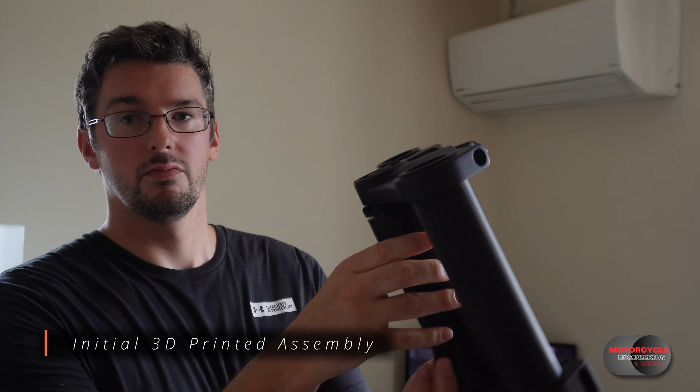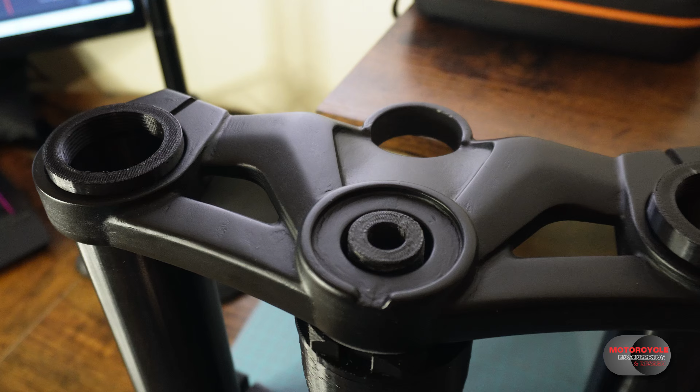So this is the mock-up of the headstock assembly with the triple clamp, top yoke and bottom yoke assembly. And this top yoke is actually based off of a Kawasaki, I think it's a ZX4R these days. I quite like the design, so I had a little go at modelling it and then I 3D printed it. This has no variability, of course, so what I wanted to do was work on trying to create a top yoke that had some variability.

And the way that I did that would be to split the clamps here, and the part that would then attach here would incorporate the clamp for the handlebar. So let's have a look at that. So if you're interested in 3D CAD, that's coming up now. If you're not, then skip to here.

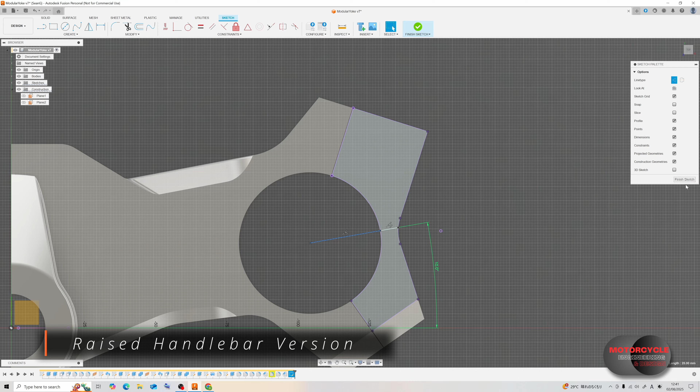Okay, so this is where we left off at the end of part 1, just with the whole right hand side modelled minus some details, ready to mirror across. But before that, I want to continue with modelling the modular parts. So I want to start working on the right hand module, and for this I want to build a tower which is going to provide somewhere for the handlebar clamp to be built into.

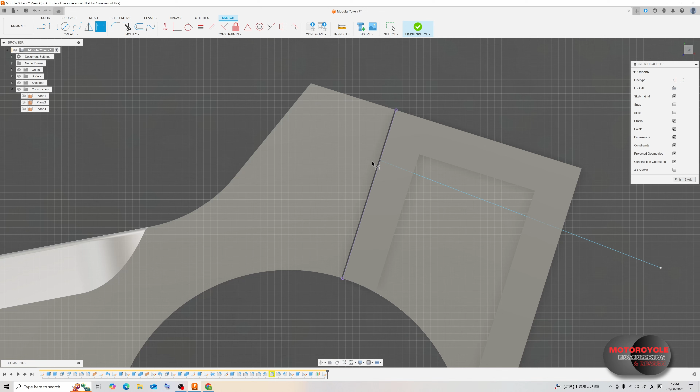Now this doesn't have to be a solid block that's been extruded here, so I have kind of shelled out the inside of this extrusion here. Then I'm using an offset plane, so that I can adjust the height that this clamp feature is going to be built later on, just in case I want to change it.

Now I'm also setting up where the handlebar is going to be, the handlebar clamp feature. So this is the axis I'm positioning here. I'm just setting the length and the angle, so it's about 23 degrees and 250 millimeters in length. Of course this sketch is only from a top view, but the handlebar is actually going across 3 dimensions.

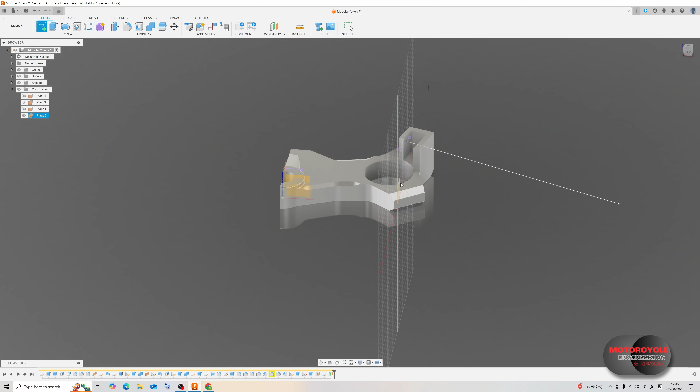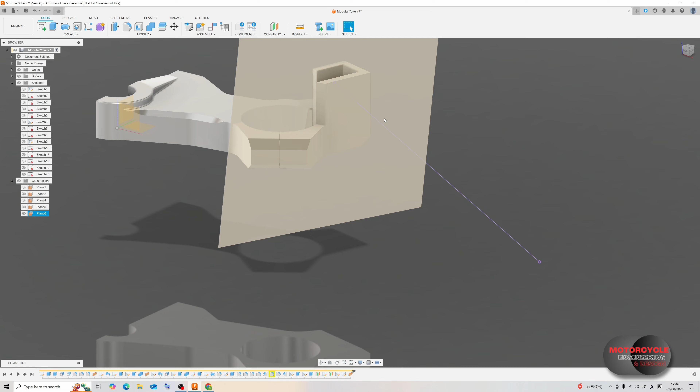So I add a sketch on the central plane, add an angle, constrain it in terms of distance relative to the top sketch, and then I create a new sketch and then use the intersection curve to create that 3-dimensional curve. Now that I have that, I can start using a plane along a curve and position it at the very end to then start building up the actual structure where the handlebar is going to be clamped into.

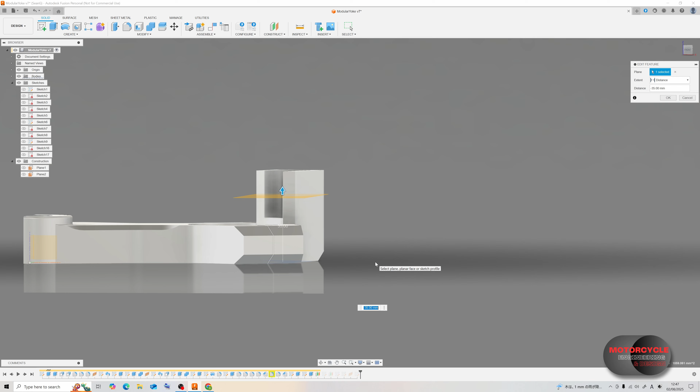So I'm now starting to extrude the boss feature, or the structure that the handlebar is going to be clamped into. And I can easily adjust the height of this by adjusting the height or the offset of the plane that I used to construct this geometry earlier.

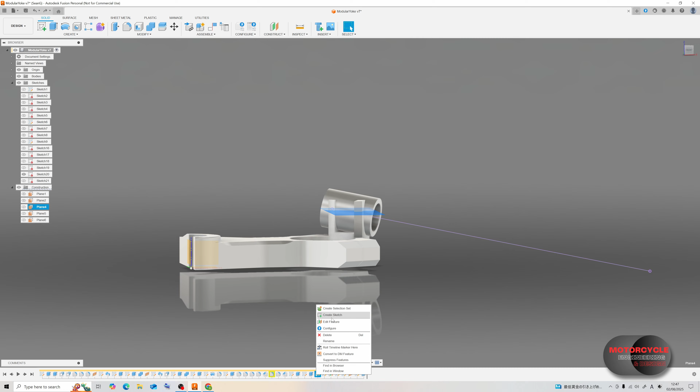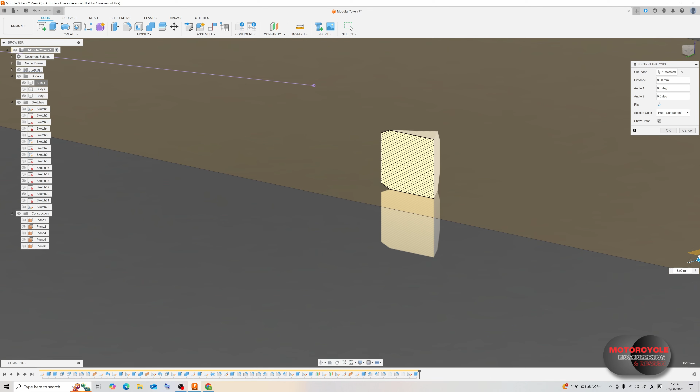Now sometimes strange things happen in Fusion 360, and I came across a strange bug here. My main body wasn't recognized as a body, so I could never combine it with anything. But I did spend some time going through the model trying to figure out what was causing this problem, including using a cross-section view to see if there's anything abnormal. But no, there was nothing. This was all resolved just by restarting Fusion 360.

So you'll notice there's some slightly different geometry here since I did actually remodel it before I realized I just had to restart Fusion. So I just wanted to add some extra detail here, so I used a mid-plane across this structure, and I sketched out a profile to cut and added in some chamfers.

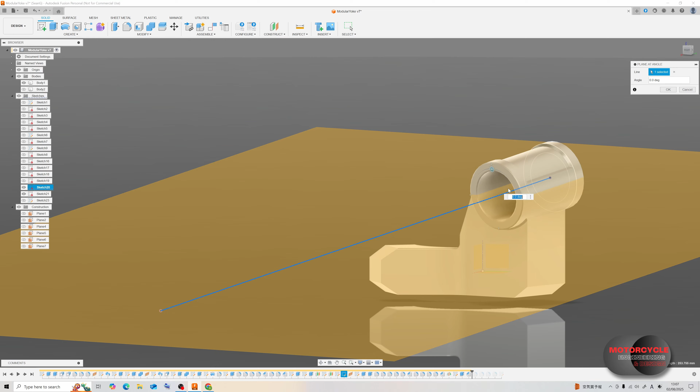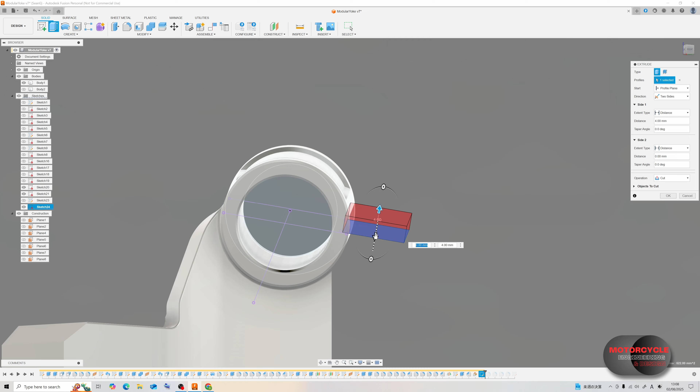Now of course this is actually going to be clamping over the handlebars, so I need some clamping force. So I add in some material for the bolts. Of course the way I've done it here is very rough, but it was just to model it simply. It would be much better to have rotated this round the body so that it was actually clamping into the tower, and that would have just made it a bit more tidy.

And if you spend too long in CAD, you'll start seeing animals or faces in almost everything.

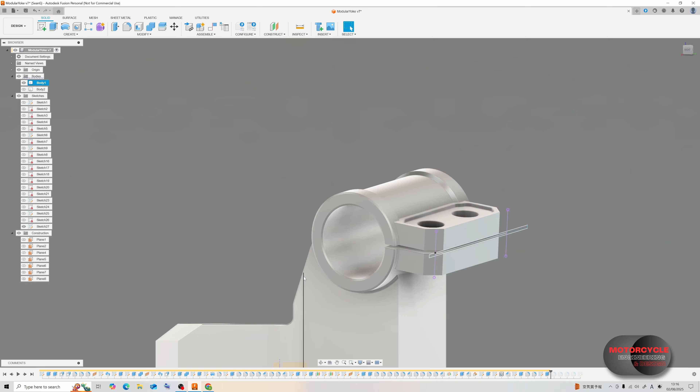Now for the main body, I want to add a little extra detail just to stylize it, make it a little bit more aesthetic. But I also have some ideas for a riser to clamp into this feature later on. We may come to that in another video.

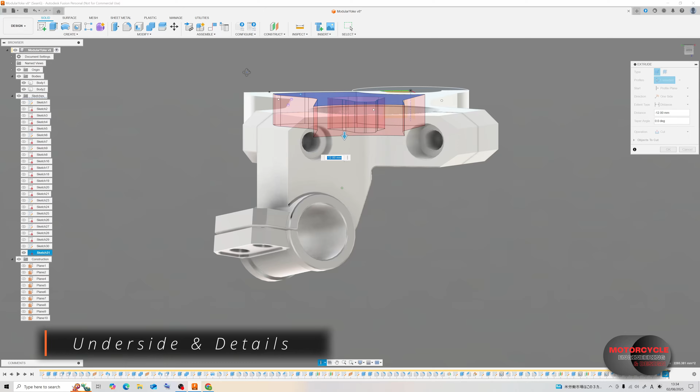Okay, now I want to start removing the material from the underside, so shelling this whole piece, but then also including some rib stiffeners. I've added a part in the center here, but actually I don't want that, so I've removed that. I've added in a new rib because I actually intend to enclose a keyless module inside the yoke here.

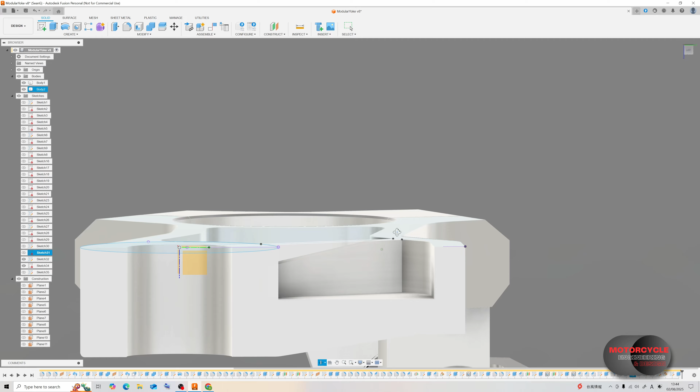And there's a lot of other details that I added in, like rounds and chamfers, and also this cutout here which I intend to be used for some clamp feature for a future riser concept.

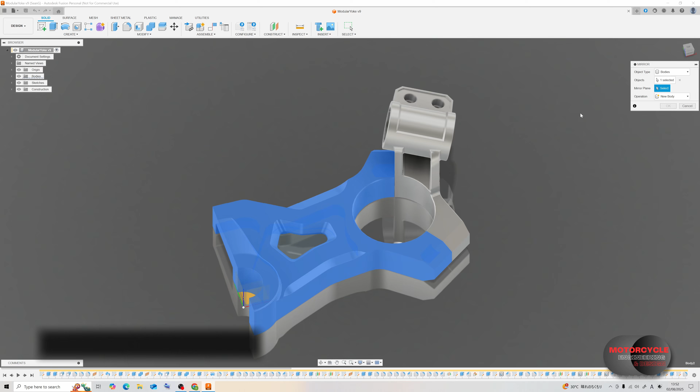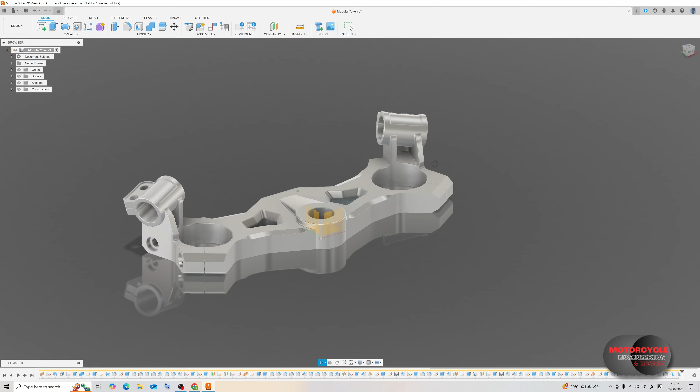Okay, so now it's time to mirror the bodies so that we can have a complete top yoke. And this is a configuration with the handlebars in the upper position. Not quite as high as risers, but more of a sports touring position. But of course, now that the model is more complete, I notice that there are a few things that I want to change, so just a few extra details to add.

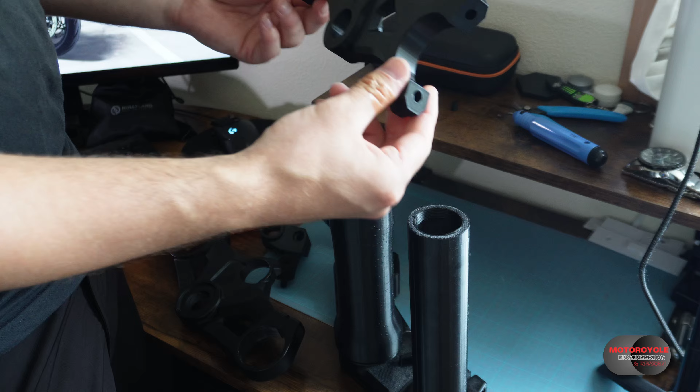Okay, so this is my first modular top yoke design. There are a few changes I would make to this going forward, so maybe there'll be a V2 in the future. Okay, so this is the variable top yoke, and these are the modular clamps.

Now the way that I've modeled these to assemble them is just with these cylindrical extrusions which are going to fit into the bolt holes. So starting with the right one here, I'm just going to have to apply a little bit of force to allow these to go in easily. Okay, just like that. Okay, so this is now ready to assemble.

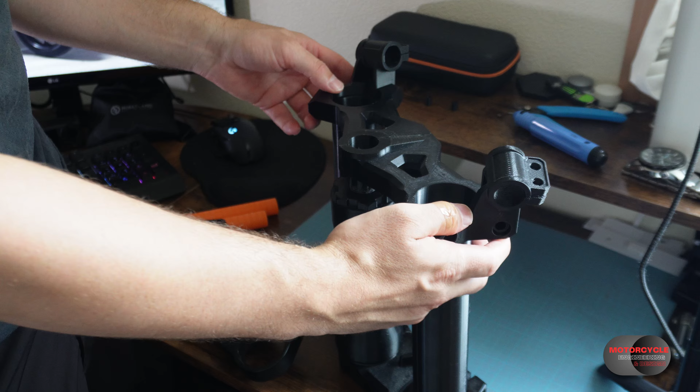And to go with that, I have these orange handlebars that I printed off, which, really, I could have just bought some. But this is essentially the assembly we have now.

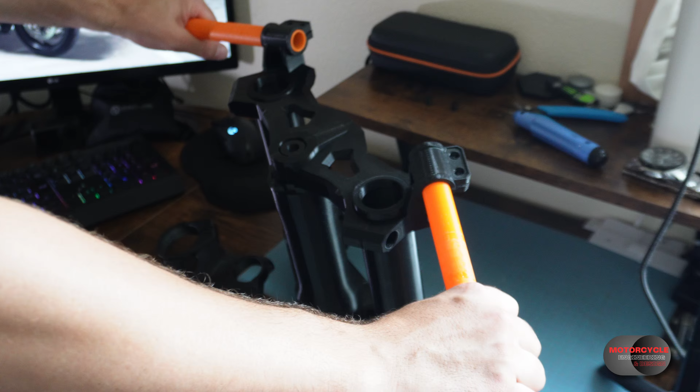Okay, so this is the configuration that I envision for sports touring, commuting, a little bit higher up, a little bit more comfortable, and allows you to sit a bit more upright on the bike. Now, of course, we're going to have switch cubes, we're going to have the throttle, potentially heated grips, various things attached to these handlebars.

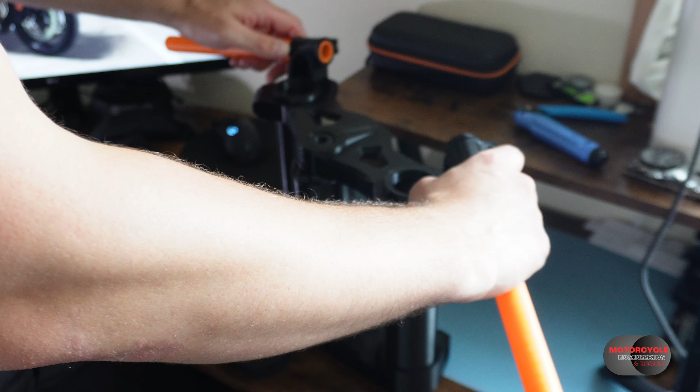Okay, so this configuration is great for the sports touring, commuting, whatever. But what if we want to go for a blast on the weekend? We really want to tuck in. We want to drop our hands down a little bit. We want to get some clip-ons. So I think that's what I'm going to model next.

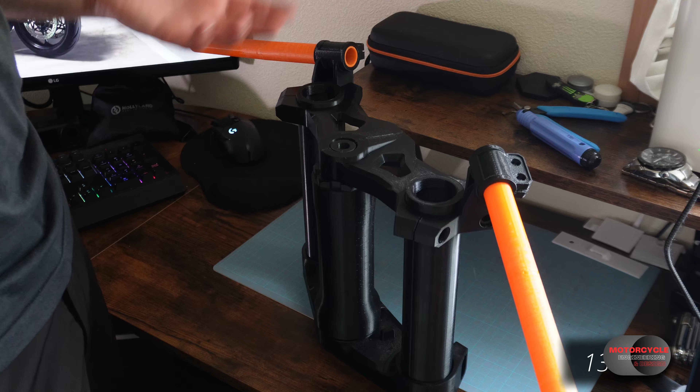Again, you'll have the CAD come up here. If you're not interested in the 3D CAD, then you can skip ahead to the next part once I have it 3D printed and assembled.

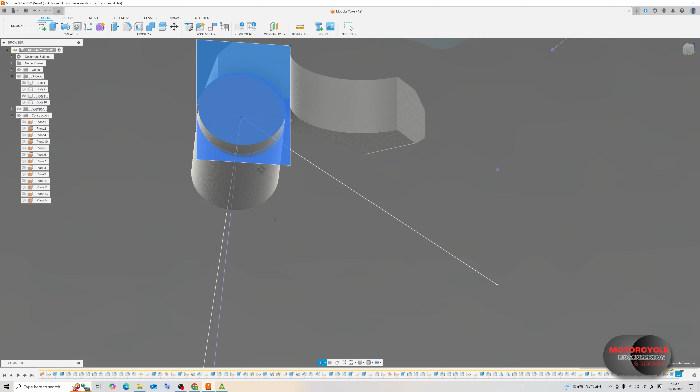So now it's time to start modeling the lower clip-on version. So I'll start with building the clamp feature underneath the main body of the yoke, and then I actually build the tower into it afterwards. This tower is a bit different because it's actually a lot closer to the yoke. So I just leave it as a kind of block and then just try to merge them together nicely.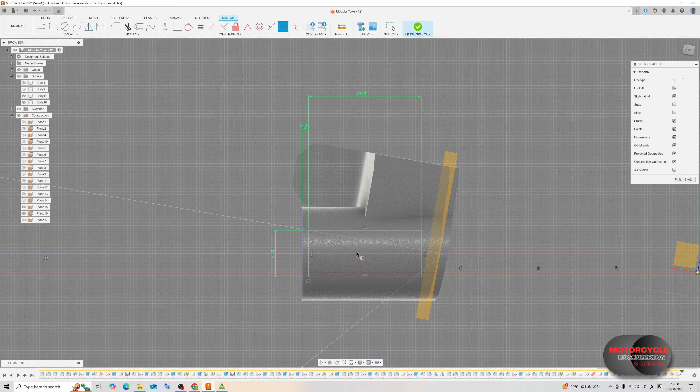I'm also referring to the dimensions of the upper version to ensure that I get some of those dimensions common across the upper and lower parts. Again, this clamp feature would look so much better if I'd actually worked it into the main body of the clamp module, but as I've modeled it here, it's not the most attractive piece, but it's simple and it does the job.

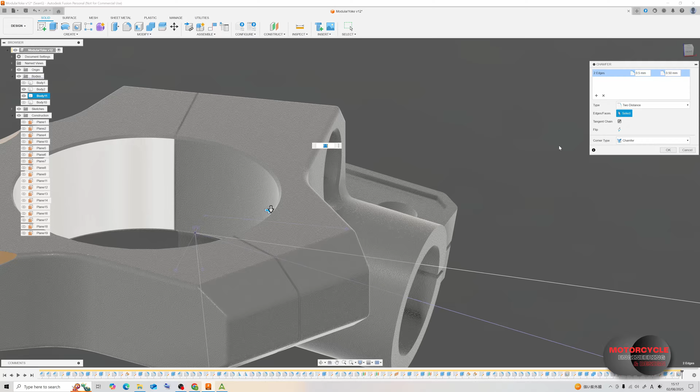Then I'm just working on some extra features to ensure that I can actually assemble it together once it's been 3D printed. And then here I have my final product for the lower configuration. From here it's just time to go into the appearances, start applying those materials.

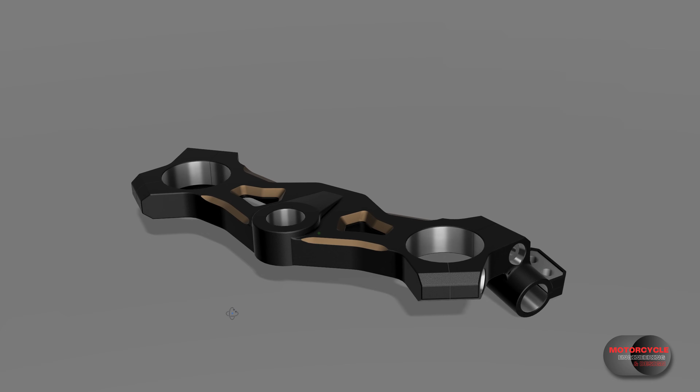Now, even though they have these ugly extrusions for the bolts, I'm quite happy with how the general design has turned out. And whilst I'm probably not going to get this one CNC machined, it's probably something that I will use and develop to eventually get to that point. Be warned, there is a lot of noise from cicadas coming up.

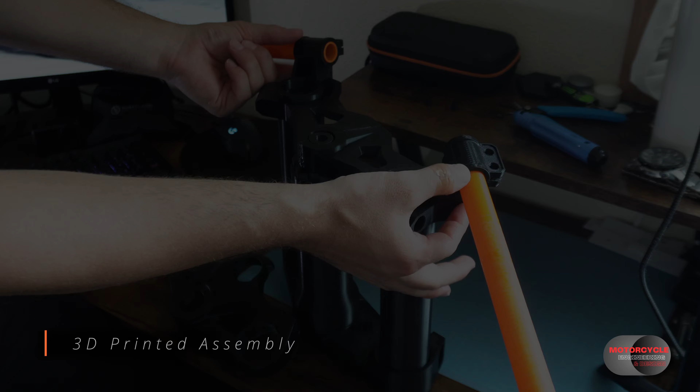So the idea here then is that we can undo the bolts which clamp them in here, set those aside. We wouldn't actually have to remove this in the final version because it would be threaded bolts, not these extrusions. So this would still be installed.

And then in practice, what you do is you take your clip-on version, which I've actually made a mistake. I've modeled these a little bit bigger diameter, so they actually fit very loosely, unfortunately. So what I've actually done is I've printed these small sleeves that I can then fit over the top, and then hopefully this should stiffen that up a little bit so it's not so loose.

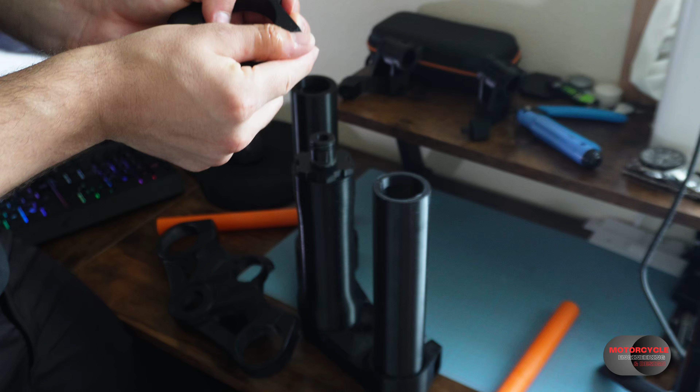Okay, now I'm going to remove that just to help with the install a moment. That'd be the wrong way around. Okay. Now with the same central piece, we have two different clamps, and we can just slide in the handlebars. Now we have a clip-on configuration.

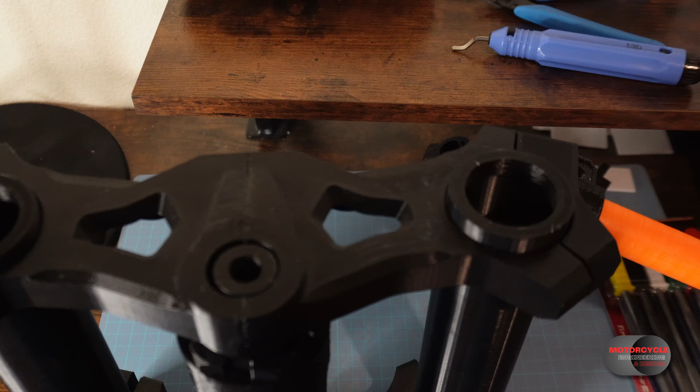So this is the idea that I've been toying with as a very quick and simple way to completely change the ergonomics of your bike. And I think this is going to be one of the first things that I actually try to do for real when I order a top yoke to be machined.

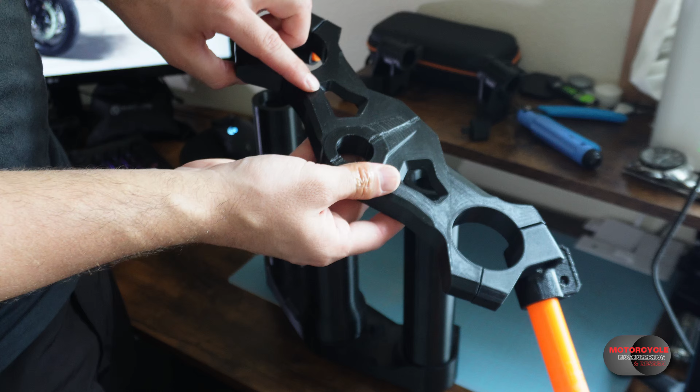So as for the top, you see that we have this kind of design that I put in here with a slanted surface. My idea is that we'd have a riser, which actually has a surface which mates up nicely with this. So those would sit on top here, and then on the underside we'd have some kind of clamping feature. And then we could have 3 different configurations on one yoke, very easy to swap between, and that's the concept that I've been going with.

So, okay, so now I have my sports touring version, my more comfortable commuting version. Then I have my clip-ons for a weekend of spirited riding. Now all that's left really would be some hooligan bars, so maybe we'll look at that in the future. Okay, so that's it for my modular top yoke design.